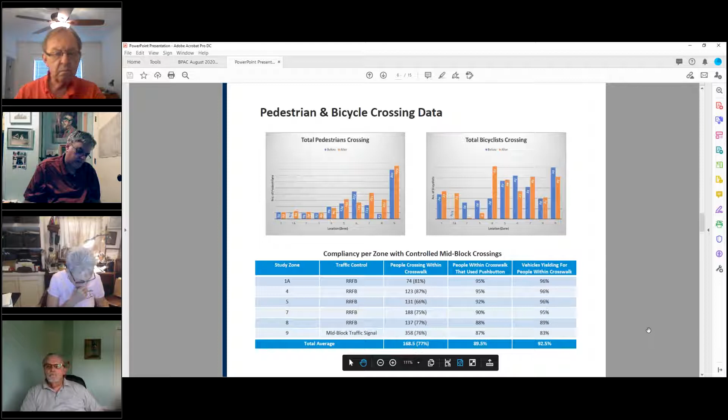And just a comment there, I know it's easy to say let's just go lower the speed limit, but you actually see an increase in crashes if there's not other things done to help lower the speed. The differential is what actually causes an increase in the severity of crashes. So these type of treatments, which overall lower the speed of the roadway, will have an added benefit to the overall corridor.

So just to go through the crash analysis here a little bit, let me zoom in a little bit so that we can see that. I'm sorry, I'm trying to get rid of this thing.

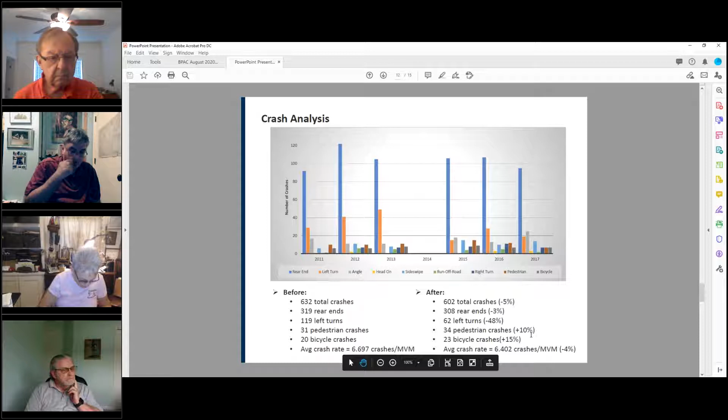So the rate of crashes total declined slightly, although you can see there was an increase in pedestrian and bicyclist crashes. The severity of crashes was down significantly. Just to break those down a little bit more, the volumes were up by about 13%. The injuries were non-incapacitating down by 10%, incapacitating down by 18%, and fatalities down by 50%.

Good. Yeah, that's what I recall, and it seems that's a positive outcome.

Maybe we could do something about the right hooking, such as painting the bike lanes as opposed to just marking them, putting up bollards, although it's kind of hard to put bollards in an intersection. If we could make green boxes, I don't know. Perhaps somebody at MPO could come up with an add-on, if we could think of something.

It's certainly something that we will continue to look at, but a lot of these interventions, mid-block crossings, lowering the speed limit, narrowing the lanes, are really a lot of the interventions that we're able to make, and they are effective. There are studies and crash mitigation factors that go along with these treatments that have been heavily evaluated. And we are retrofitting some of our older roads. We are working with an older system, and it takes time, and it's going to take more time to really continue to bring these numbers down.

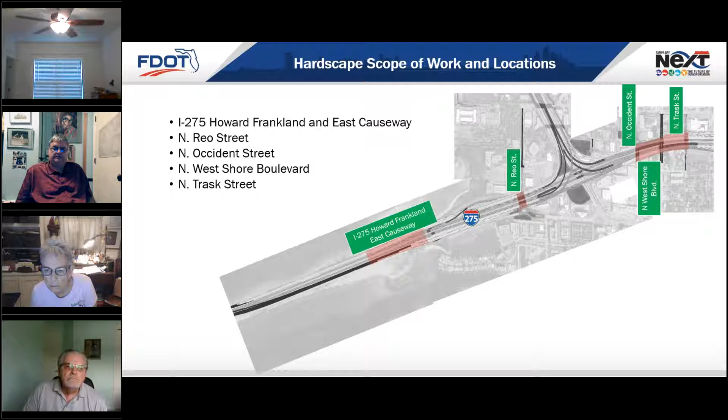Next slide. The process is long and full of meetings. We try to get everybody's involvement, and what we're currently working on is the first round of three reviewing the concepts. So what you're going to be seeing here is part of that first round of development, where we try to develop ideas and areas of opportunity for what we want to do and where we can do it at these locations. What you're seeing on the board is just some inspirational items that help us move along with what we can apply the aesthetics with.

Next slide. First board here is the Howard Frankland Causeway on the east side, as you're leaving or approaching Tampa depending on direction. We're looking at two locations, one on either side of the seawall, and the other being a more solid monumental item that sits off to the side in the water. The exact location and design are still to be determined, we're still laying out the guidelines of what this is supposed to be, so don't take any of this as literal, it's all conceptual. We've developed different views and versions of the concepts to help work through what it might look like in scale and size.

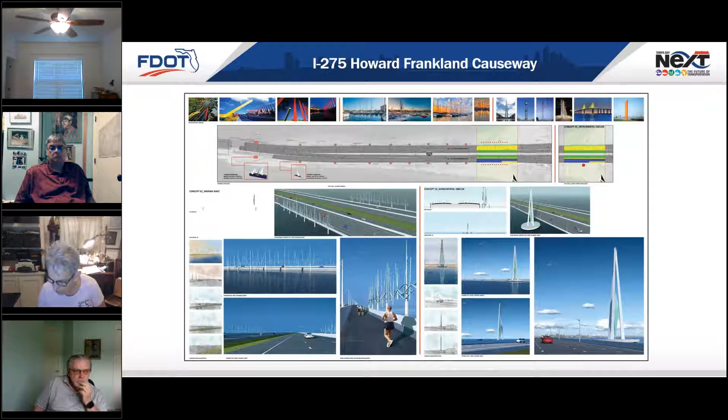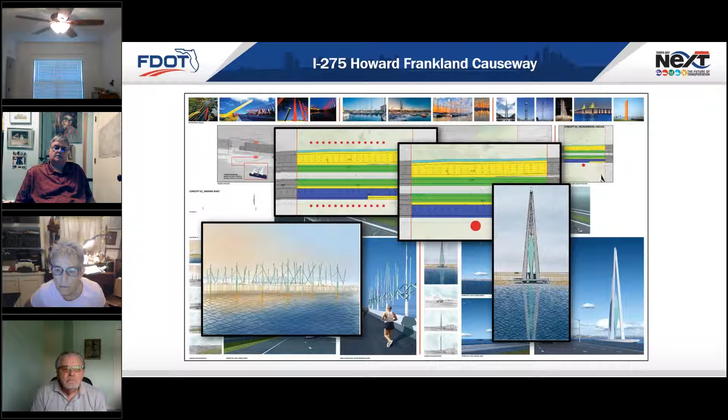Next slide. There's a blow-up of some of the images there. You also saw on the previous board that we're incorporating and acknowledging what they're doing for the aesthetics on the Howard Frankland as well, so we're not completely ignoring them.

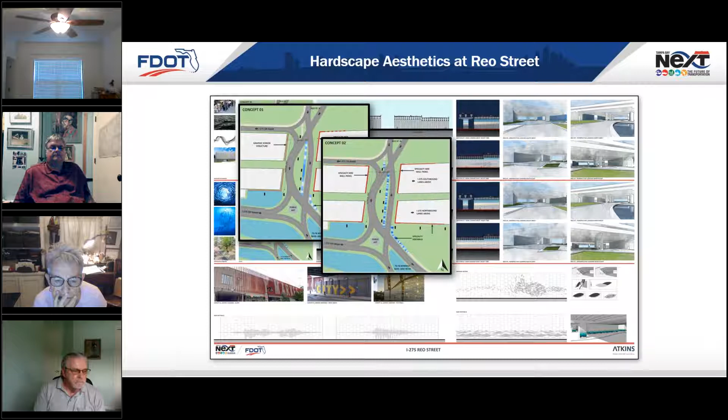Here we have Reo Street, you can click through that slowly. Again, we're looking at different ways of aesthetically treating the MSE walls, the sidewalks, the piers if any, maybe doing a standalone screen structure underneath, and trying different things with how the roads connect with pedestrians and trails. We're also making observations for public art opportunity, showing different MSE wall patterns and ideas that could be public art or a static installation expressing color underneath the overpass. We also try to address this with lighting as a common theme throughout these aesthetic treatments.

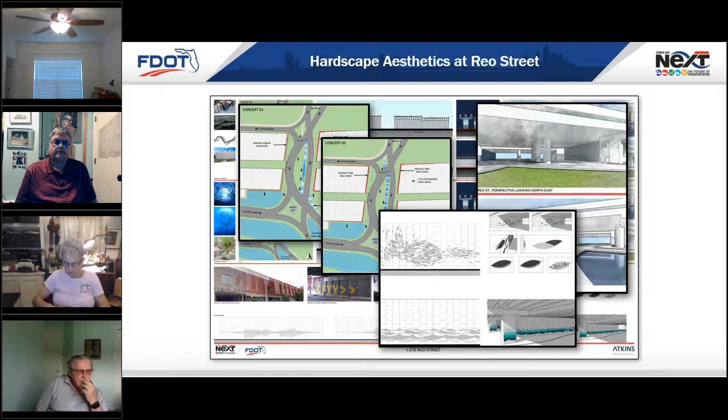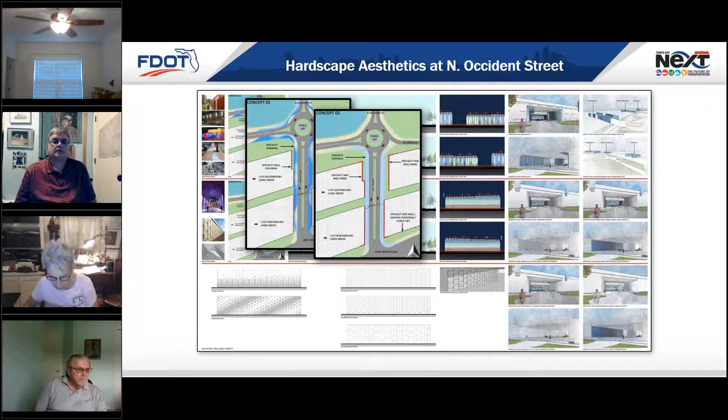Next location is Occident Street, where we have a roundabout to include. We treat part of the sidewalk, and we try to focus this one on being more pedestrian scale since vehicular traffic was expected to be slower and lower count, so we scale things down. We try to involve the roundabout, marking an area of public art opportunity. In this concept we've got the screening, a type of graphic screening, and in the next one we focus on specialty MSE walls and where we can highlight and apply those to the area, with some 3D sketches to give a sense of scale of what's going on.

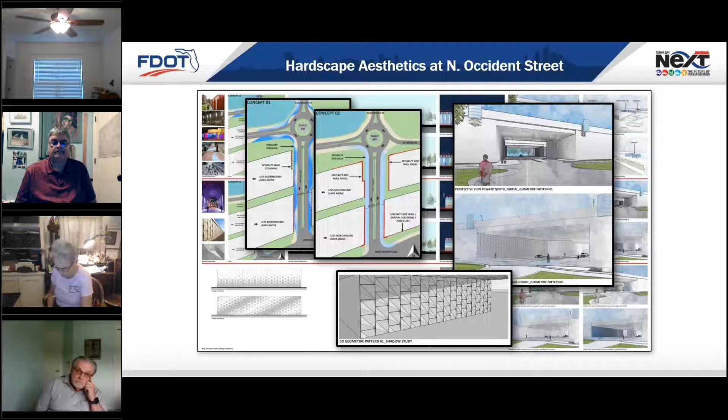And then the idea of playing with 3D MSE walls, so we do little sketches and 3D models for that as well.

Next location is West Shore here. A little bit more vehicular traffic, more pedestrian traffic, so we try to work on a bigger space. We've looked at different sidewalk patterns and treatments.

So again, we have graphic screening, and you can see on the concept boards here that they're a little bit more elaborate.

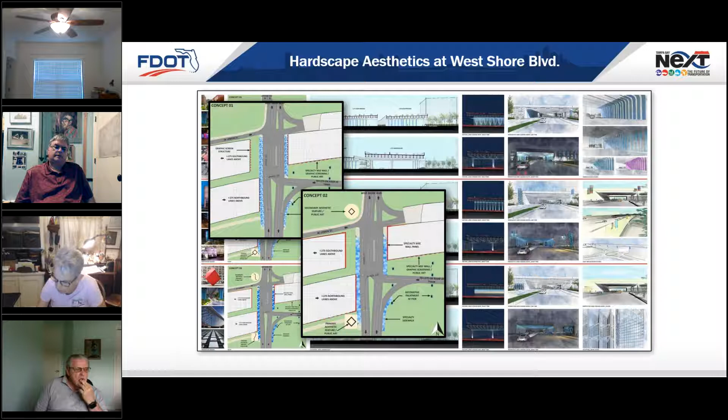And here we're talking about some freestanding structures combined with some specialty MSE walls, kind of bookending West Shore as you're driving through, allowing this to be more of the center of the West Shore district area, kind of like an icon marker.

And again, some 3D sketches, some with nighttime, just to kind of emulate what lighting might look like.

And then there we have some 3D sketches of the tower idea, a freestanding structure off to the side. Something that people can interact with or walk underneath, walk around, or ride their bikes around as they come through on the trail or along the sidewalk along West Shore.

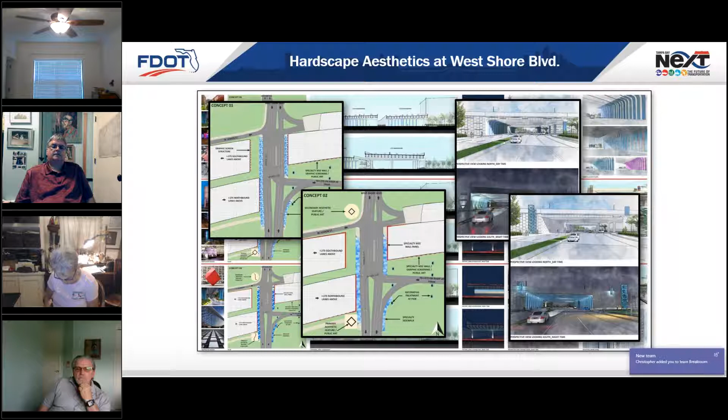And then lastly here we have Trask, where we have a little bit more piers from the roadway as an open structure underneath. So we'll be looking at treating those piers aesthetically as well, and they'll carry on over to the West Shore area. Again, the ground cover locations where the MSE wall is, or the graphic screening.

There we go. That one is for the MSE wall and where we're treating that for any specialty MSE walls.

Again, we've messed around with different types of sidewalk patterns throughout. And the idea is that if people like one pattern in one location but they like it in all the locations, we can certainly look at doing that. We're not trying to say that this is specifically only for Trask or only for Occident or only for West Shore.

We have lots of ideas and lots of things we're trying to get out there, so we're trying to put as much down on paper on these concept boards for people to react to and give feedback on.

Next one. Here we looked at some different pier treatments, what we can do where we're not totally completely different from the standard pier treatment that's being done, and just kind of enhance it and make it a little bit more unique to the area.

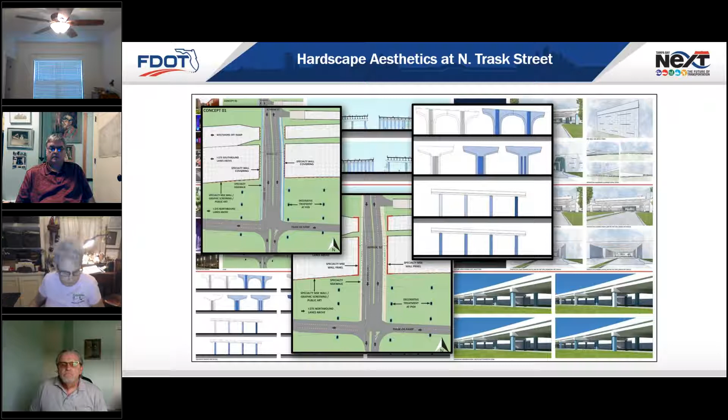And then one more slide. We did some 3D modeling there just to kind of see what it would quickly look like underneath.

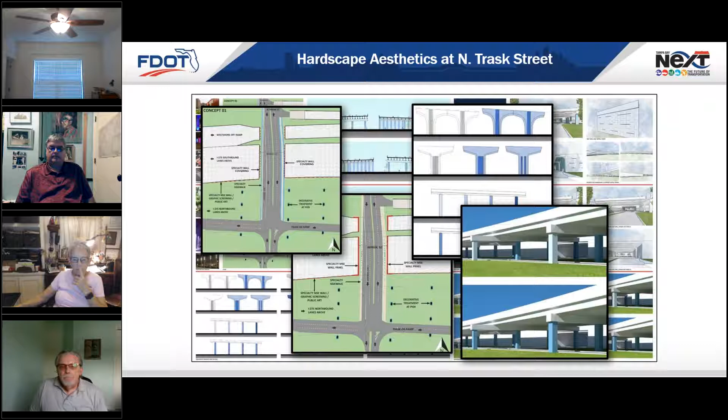So we've got a unifying theme that we're looking into. We're looking at doing repeating wall structures up above, so that as you're driving along 275 you can see these items as you go through the area, so that all these aesthetics are not just for people on the surface roads, but for people driving through on the 275 up above as well.

And then we also have key locations of MSE walls that we can treat kind of like a big broad open palette, if you will, of spaces that you can use along the trail or underneath the overpass, which leaves opportunities for some large scale aesthetic treatment, be it public art or just simple color or who knows what, but we're at least alerting everyone to the possibilities.

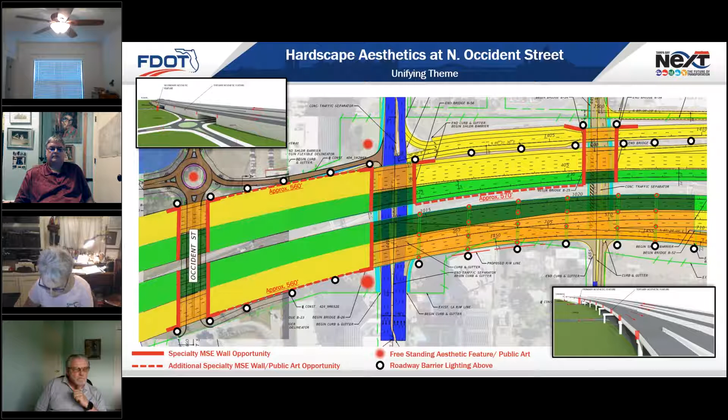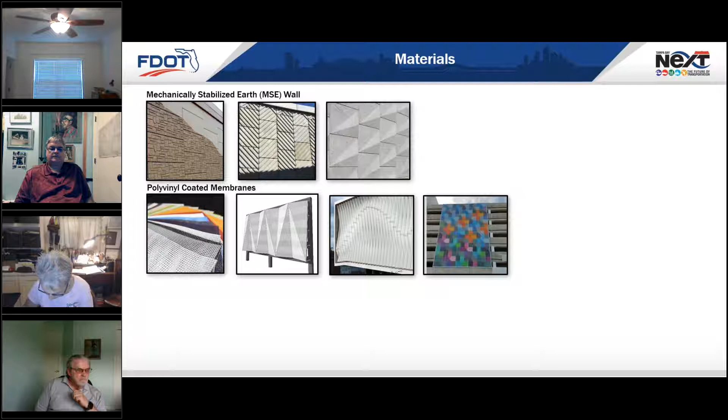And I think that's it in a nutshell. We can briefly click through these - these are just some of the samples of materials and other items that we're looking into that could be applied to multiple of these locations.

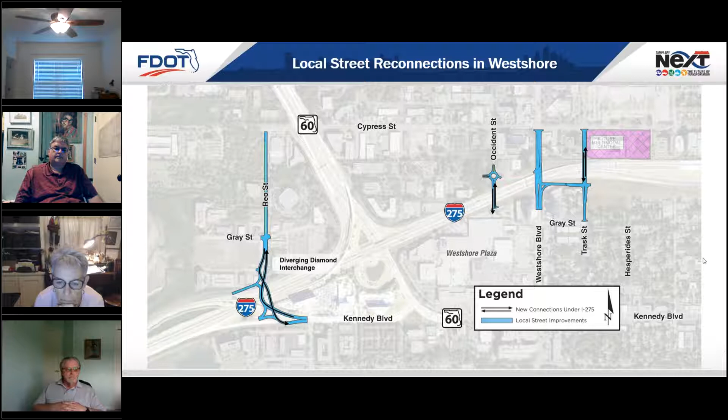So you have the ability at that point to go south and go through the interchange and come down to Kennedy and Hoover, the signalized intersection down there, or you can go north up Reo Street toward the Cypress Point Park. Next slide please.

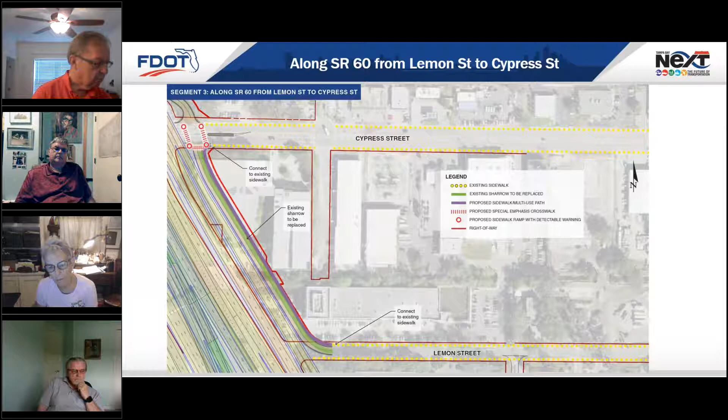Next slide please. Okay, so coming down Lemon Street, it's sharrows all the way until you get to the Occident area. This is the new roundabout that Mark showed. When you get around the roundabout, you can see that the line width gets a little bit thicker, obviously intended to be a wider sidewalk around that area.

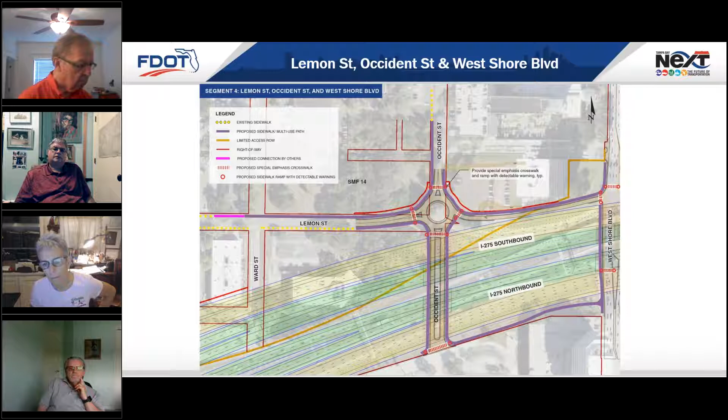But the intent is to show the connectivity that we're trying to go north to tie into the existing sidewalk, which is the yellow dots, and then also pick up from the Lemon Street existing sidewalk. All of that, the trail would come around down through Occident, which is that new underpass area. Then we would be coming from Occident over to West Shore, again within the DOT's right of way, and the trail over to West Shore. So next slide.

We come from West Shore over to Trask, and then Trask to Hesperides. The bright blue line represents the trail that DOT constructed as part of the I-275 design build project back in 2016. So we're tying into that existing path that's already there.

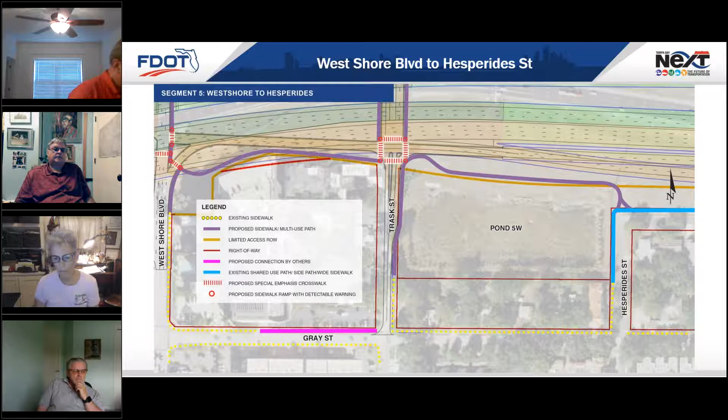This is the continuation of that trail we built in 2016 along Carmen, up Lois, underneath Lois, and then off to the right. That trail goes all the way out to Church, which is one block west of Dale Mabry, for anyone who may not be familiar with this.

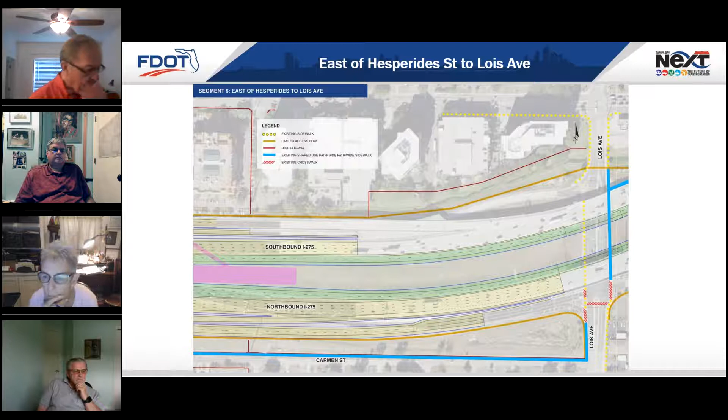This is just to show you that Trask Street, as it's going to be opened, we have trail connectivity or wide sidewalks that go underneath the interstate that would tie over to the future multimodal center.

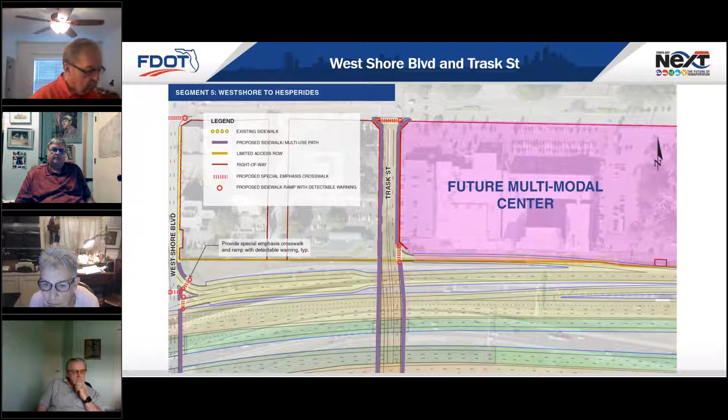So that was a quick overview to show you this is a first cut of our goal: providing connectivity coming off the Howard Frankland Bridge and trying to fill the gaps so that we have wide sidewalks, trails, and utilizing some existing areas with sharrows, like we currently have on Lemon, to provide connectivity over to the trail we already have down to Church. Little by little, we're trying to fill this, but this is our very first cut.

It's an iterative process. We're working with the designers, and as they identify safer or exact locations for crosswalks, or may need to modify something with a retention pond or whatever, we may be tweaking this, and we'll be coming back to you.

We're going to present the same information to the Livable Roadways Committee and to the neighborhood associations in the area, then we'll make revisions and work with the designers again. We're going to start round 2 meetings in December, so we're hoping to come back to you again in January with additional updates. Like I said, it's an iterative process.

This is just the very beginning concepts, and this will be going on for a while, but we wanted to bring it to you so you could start digesting it and giving us comments and suggestions. I wanted Mark to go first so you could see the big picture—it's not just the trail, but the aesthetics that go with all the underpasses and the MSE walls, and the potential for public art. So it's not just a ride along the interstate; it can be something that's an attractive travel route.

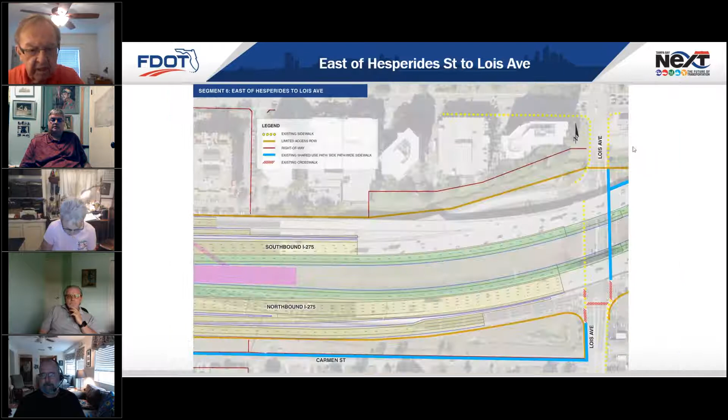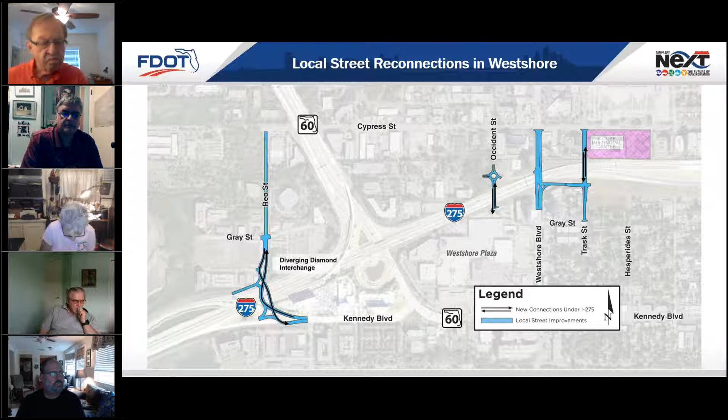Yeah, that's correct, Jim. Let's go back to the Reo area, next slide. I think you were away from your desk when we first started.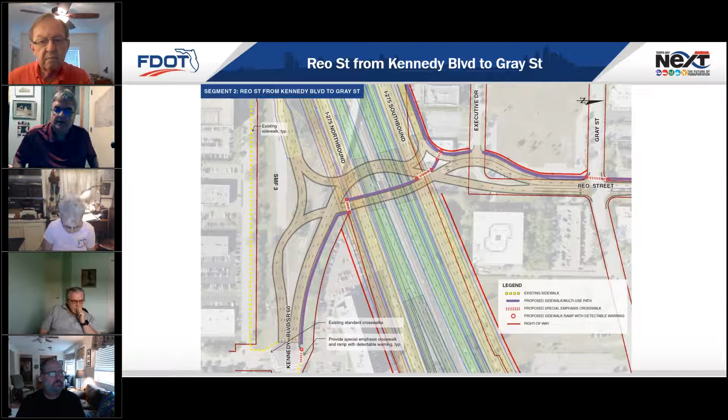So this is the Reo part. At the top there at Kennedy, right underneath the word Kennedy, is where the trail comes in from the Howard Franklin Bridge—that purple line is the trail. It comes in, and then you can either take it north up to Cypress Point Park, and as you were saying, that 10-foot sidewalk goes out to the U-Path, across Courtney Campbell and everything else. So we're making that connection.

Or you can come south through there, which takes you to the signalized intersection of Kennedy and Hoover. For anybody who lives in South Tampa, most people come out in this area—this is where you go back through Beach Park and ride back that way. That's how I usually ride through. There's also a sidewalk that goes over to West Shore Plaza in that area too, but this is the limits.

What you're seeing in purple is what DOT is proposing to construct. When you were talking about it earlier in the presentation, you didn't mention the U-Path, and I thought that's something you really want to bring out in your discussion because of its interconnectivity. Oh yeah, that makes good sense. Thank you.

Other comments? Yeah, this is Tim Horst. I've got a question.

So that side path there that's going along Reo, that's going to make the connection to Cypress, is the goal to make that 10 feet wide? And also, is the DOT going to be purchasing right-of-way there, since I know it's really constrained as is?

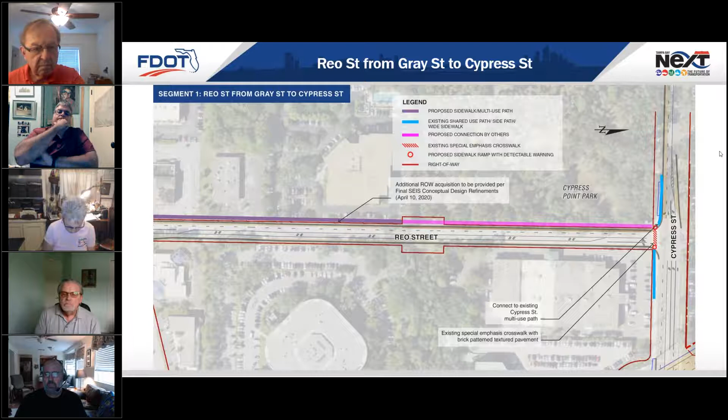All right. I don't know if there are any other questions, but I did want to acknowledge the arrival of our chair, Jonathan Forbes.

I put a question in the chat box. I might have missed it, but how wide are the proposed sidewalks or side paths and multi-use paths going to be along this?

So this is a work in progress, as I was saying, and we have to work with the designers and everything, so it depends upon the location. It could change, but right now the goal is, if it's a trail, for it to be 12 feet wide.

This particular area right here leading up to Cypress, that little piece that we're on, is 10 feet right now as it's drawn.

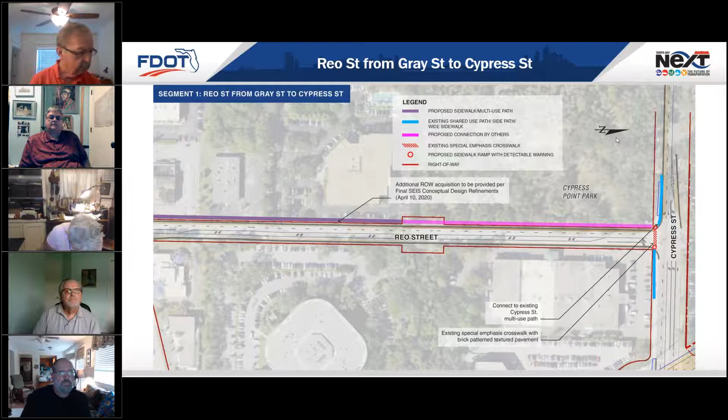So going through the underpass area, like if you want to go to the slide before that, right now going through the interchange at Reo, the area that's right underneath the underpass, we've got it drawn as 16 feet right now, but you can see it's huge, so we have some flexibility right underneath the interchange.

It really just depends. In some cases, like where we're extending it north to try to tie into a sidewalk, we may be tapering from a 12-foot trail to a 6-foot sidewalk. So we're going to do a taper, and we're not going to just truncate it.

Thank you. Thank you. You're welcome. We should have more details on the exact locations and widths in round 2 when we come back to you in January.

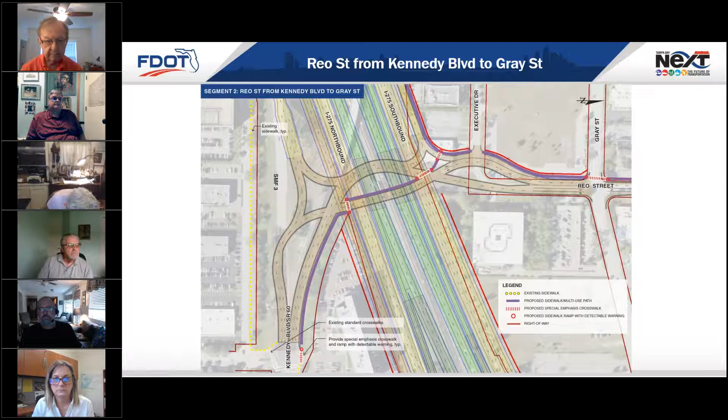Great. Well, if there are no other questions on that part, we can move on to the Safe Trip presentation.

Thank you, Wade. I am Margaret Kubelins, and I am the Safe Trip program manager, or engineer, sorry about that. It's been a long day.

So it's really exciting to see what has already transpired. I've actually never seen some of these elements of what is happening within the West Shore area that were just presented, and I'm very excited about it, and you'll see why, because it does play a part of Safe Trip. So, next slide please.

I don't think I need to tell everyone, but remind you that the governor back in the fall announced that we received $1.4 billion to reconstruct the West Shore interchange, which includes from the Howard Franklin Bridge east over to the Hillsborough River, and then on up State Road 60 up to the veterans. Next, please.

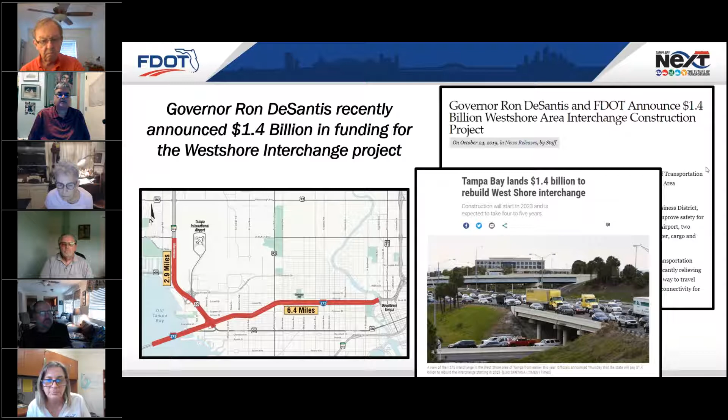Why Safe Trip? Safe Trip is the transportation management plan for the entire area while we're under construction. And that's my responsibility, to help put all the elements possible together in order to help people move through and all around West Shore while we're under construction. We have significant bottlenecks there already.

So how are we going to help smooth those out is what we're looking at and working on. We have goals that are consistent with the overall TB Next project, and it's going to take a lot of balance and travel demand. You'll see as we move forward through this process that one of the elements that's going to be key is for us to provide a wide variety of quality transportation choices for everyone that lives in the area or who's traveling through there. Next, please.

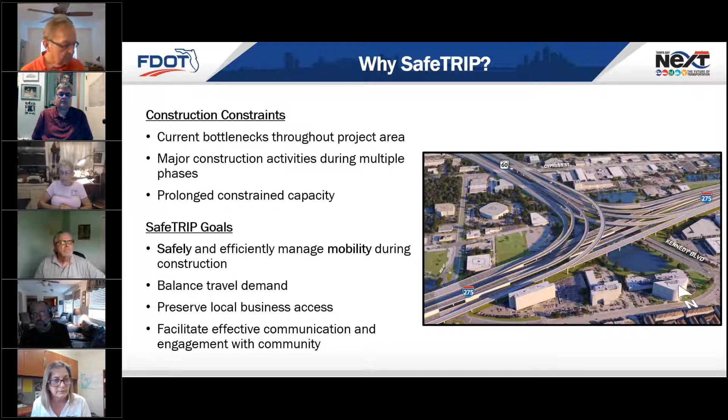Safe Trip, as I mentioned, is a transportation management plan. And safe, meaning that we want to make sure that it's safe. I'm a Vision Zero advocate and understand that whenever we have crashes, we accept the fact that there will be people running into each other. But when that happens, we want to make sure that we can provide the best conditions to heighten the probability that everyone involved in a crash will either walk away from it or be able to fully heal. With that in mind, we are looking at TRIP.

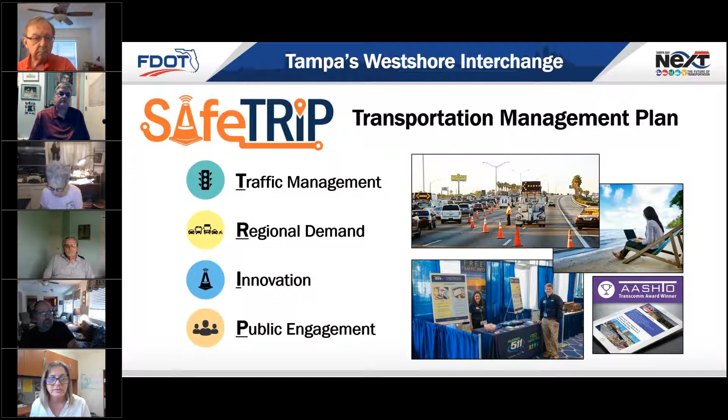The TRIP portion of this stands for traffic management, regional demand management, our innovation pieces, as well as public engagement. Let me talk through some more details of each of those. Next, please.

First of all, as you approach any kind of program, you want to make sure you have a vision that you can back-check yourself on all the decisions you make. We've committed in our vision to make sure it's well planned.

We maximize on innovation, which has a lot to do with technology, predictive analytics, and pushing real-time data out to travelers, no matter what mode they choose to use.

We are focusing on establishing our performance metrics around safety and reliability. Reliability means that if it takes you about 20 minutes to get to the airport now, once we go into construction, it's reasonable to anticipate it might take 30 minutes, but we want it to consistently be 30 minutes. Or if you're traveling during peak hour, maybe it's 40, but at least you can predict reasonably what it's going to take to get there.

As I mentioned, quality transportation choices is what's going to give the quality of life to everyone who travels through the region. Strategic innovation is the technology component, and then proactive communication.

TB Next is what it is today because we had a previous project that brought in a lot of conversation in a very difficult way. From my perspective, I'm new to the DOT, I've only been here about 1.5 years, but I see the benefit is we have a much better project than we could possibly have had because of the advocacy and outcry that was presented.

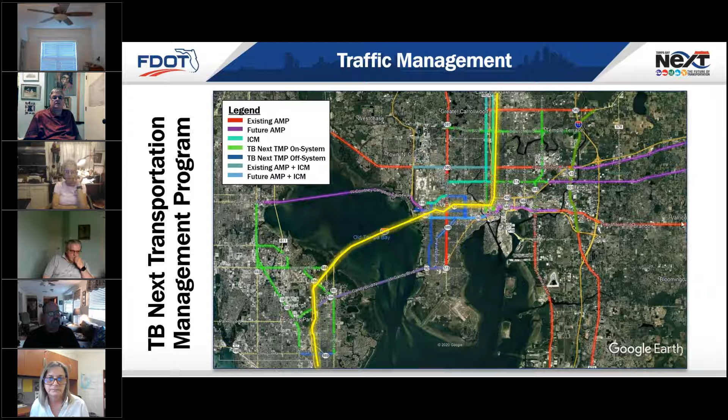Under regional demand management, where we are right now is looking at the origin destinations. We're getting the data put together to understand in more detail, from the larger picture, where we need to have better, more accessible transit projects—which routes are going to be used the most, and then how can we leverage that.

We're also having the conversation in regard to first mile, last mile concepts in planning. For the first mile, not just having a park and ride for vehicles, but we're also looking at whether we have quality bicycle facilities or bike parking, and how we manage that as well. So we're trying to address multimodal options at both ends of the project.

We also are looking at the origin destination with a 3-mile radius concept, getting into a closer network. We are evaluating that, looking for bicycle trips. A 3-mile radius is a reasonable bicycle trip for a commuter.

We just saw a lot about the network along 275, but what about people possibly living in Soho and working in Westshore—people that are moving through the area every single day? So we are taking a look at that as well.

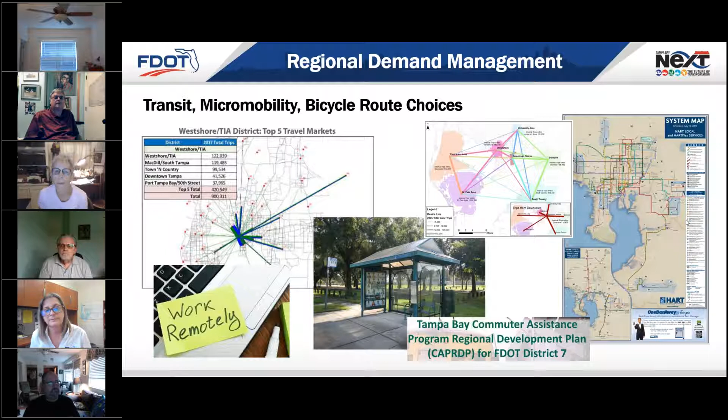So in smart work zones, there are two things we want to focus on. In regard to the Federal Highway Administration, a smart work zone needs to be portable, reliable, real time, and automated. This is technology that exists, it's just being applied in a different way.

The speed harmonization - the major goal associated with speed harmonization is to reduce the number of crashes that we may have amongst vehicles that pass through a work zone, which is really important if there's a traffic shift.

Here's another one, called the zipper merge. This is going to require a lot of public outreach and public education, and we've already had conversations about how we can get ahead of this. Wade, could you try to see if we can get the zipper merge PSA up?

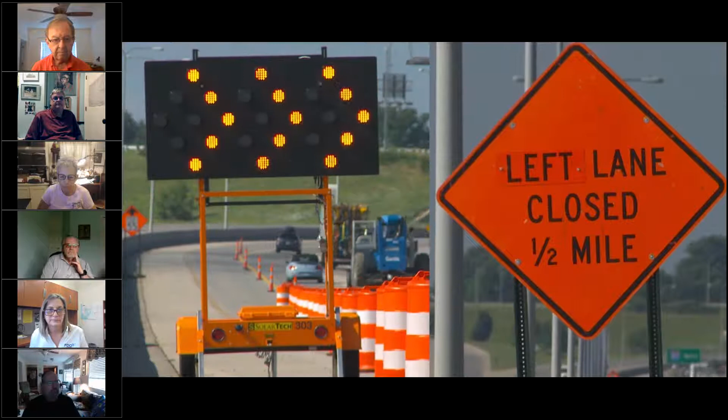Uh-oh, when we tried it, we had it. I don't hear it. Wade, should I do a voiceover, or are you going to try it again? I'm looking for the button. This is Chris, I'm looking at this. I'm not totally sure why there's no audio. There should be. Wade, you could turn the captions on as a stopgap - it's the CC button right there, next to the gear.

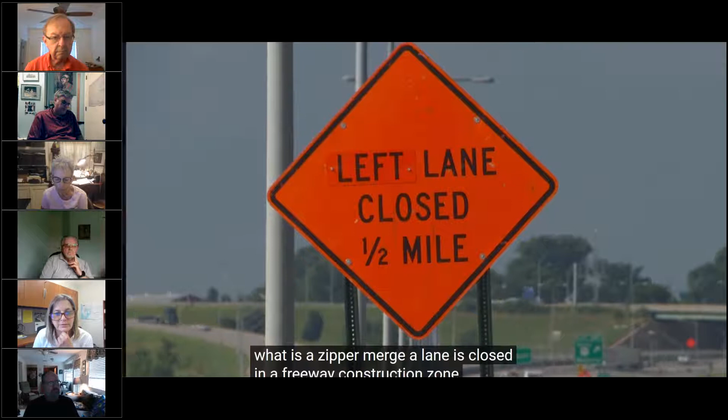Do you want to start? Yeah. I was going to do the voiceover - is everyone reading fast enough, or do you want me to explain it? Looks good to me. Okay.

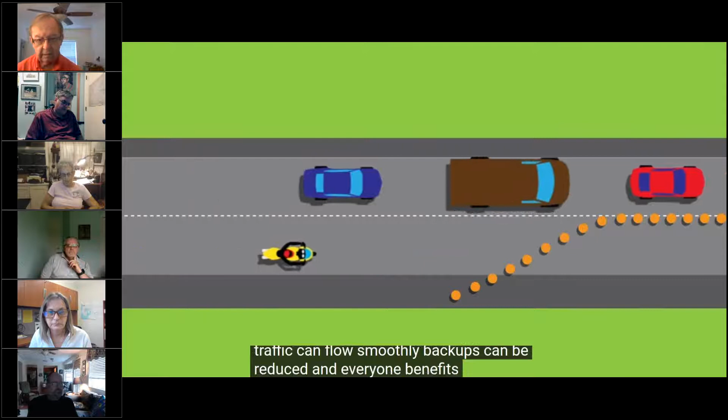Okay, well, that gives you an idea of how it works, and you may just on your own time go to YouTube and look that up, zipper merge or late merge. It's proven a very effective way to help manage the use of lanes. We also expect that once people see this being advertised through different projects, they're going to begin to apply it in multiple locations naturally.

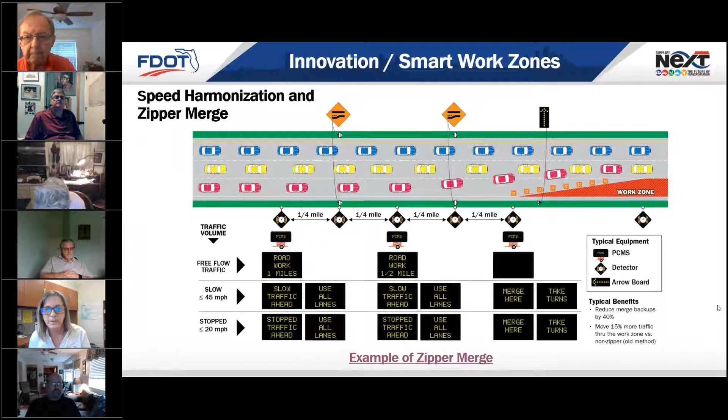So it'll be interesting to see how it changes driver behavior once they learn how it's used. We expect it's going to be similar to when we started using a flashing yellow arrow - it was very intuitive to people. Next slide, please.

So public engagement - we already have the Florida 511. That is an app you can use, but a lot of people don't realize that Waze pulls data from the Florida 511 system to help understand traffic conditions on the road. They use what's called probe data as well - your smartphone is a ping also, but this is another data source that they use, and we're providing that to them.

We also use our Tampa Bay resource - fdottampabay.com - where we have a lot of information out there. We are looking for ways to communicate with the public, and during this process we'll continue asking for feedback to make sure we're meeting people basically where they are as much as we can. Next, please.

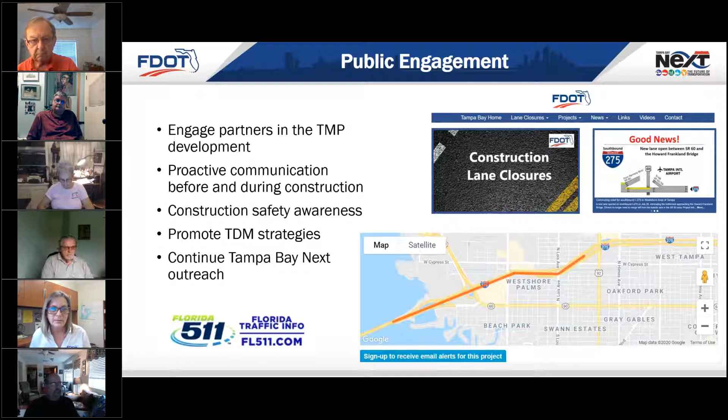We have already had a very robust opportunity to do public engagement, and we continue to provide updates to a variety of communities. Obviously, now that we've gone into virtual formats, it has actually provided us the opportunity to meet more and more people as well. As soon as we can, we'll be face to face, but we'll make do with what we have so far.

Next, please. We also have a community action task force, and here is a representation of all the members we have, so other agencies and organizations also have a place at the table. This is a bit more of the professional organization level. We're getting a lot of information from various entities and having a lot of conversations with them, including Florida Trucking. We need to make sure we're addressing all the issues that could possibly come up. Next, please.

We've also gone through a series of lessons learned. We've already met with District 5 over in Orlando for I-4 Ultimate, and we've been receiving all kinds of information from them about what works and what didn't. We already know how we need to structure the contract to make the contractors part of this process - that came out of the I-4 project.

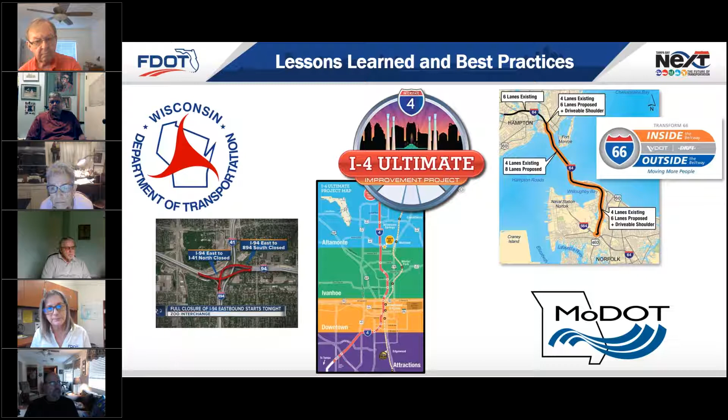So here's our overall schedule. As you know, we're in Q3 of 2020. So we are in the midst of developing our SafeTRIP plan, and we are in the process of putting just about anything and everything on the table right now, any kind of strategy. We recognize that the Department of Transportation is not going to be able to fund absolutely everything.

One of the reasons why we're having conversations with all these other organizations and agencies is that there may be an opportunity that maybe they can do a grant and bring a small element. Like I mentioned, the first mile, last mile - there may be an opportunity that if we provide bike parking up at a park and ride, maybe they can reach out and get some funding to build a better bicycle network to get more people to have that as an option for traveling to the area. We expect to have our plan done in the spring of next year.

During this whole process, we will continue to push to have early project deployment. We're very interested in getting things on the ground before we go to construction. You'll note that on the very bottom line, we show update Safe Trip - we're going to pause for about 6 months, but then start reevaluating. The Safe Trip plan will be a living document with shifts and changes throughout construction, which is going to start in 2024. It's about shovels in the ground, and we'll be under construction probably for about 6 years.

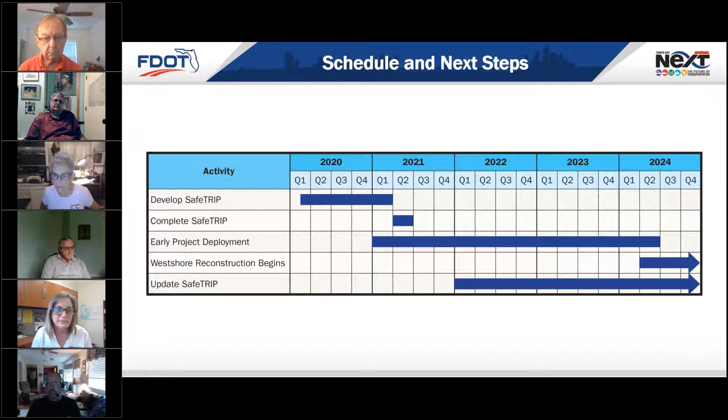Next slide, please, which I think may be the end. Yes. So I'd be more than happy - I know I put a lot of information to you, but I'd like to open it up for questions if anyone has any.

We'll get that bicycle network construction - actually, I know there's some early starts. Alex Henry is probably really grateful that I had the opportunity to listen to what is already a part of TB Next. But I'm interested, I'd love to see some of those projects already built before we go under construction. I don't know if we can make that happen, but we'll see what we can do.

Okay, well, thank you. And I can come back at any time. Thank you, Margaret. You're welcome.

Well, I'm up next. So if there are no questions for DOT, let me get my presentation up. This is just a brief update on some of the process and some of the changes that have been made this year.

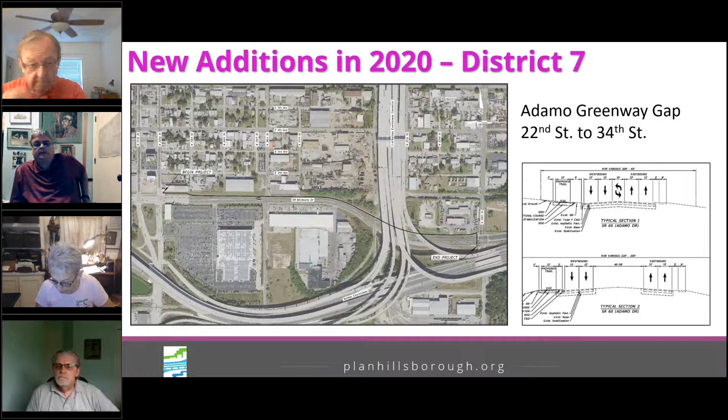Just to give you a couple of the new additions that went onto that list in District 7 in 2020 - this is the State Road 60 Adamo Drive corridor. This connects to the South Coast Greenway and Gulf Coast Trail, so where the path ends at 22nd Street, you would be able to go south or west and hook up with the Selmon Greenway, and same thing at the east end, where you would eventually be able to go over to Maydell Drive and then down across the Palm River.

The other District 7 addition was a crossing of State Road 54 at Starkey Boulevard. This is where the trail segment was just completed between Pasco and Pinellas, and it's right at the very northwest corner of Hillsborough as well. So this is something that eventually becomes part of that larger network, with the Upper Tampa Bay Trail connecting to the Gulf Coast Trail.

District 1 had several new additions, 3 in Polk County and 2 in Manatee and Sarasota. They were largely just redoing their priorities. They had a shorter list than we did to begin with, so I would not take the addition of 5 for them versus 2 for us to mean anything in particular.

But these are just the examples: the Lake Hunter Trail, the Fort Frasier Trail Extension, the Panther Point Connector, the Palmetto Trail Network, which would be the city of Palmetto, which is a really important connection as we try to bring the Gulf Coast Trail down through there and then up into Hillsborough. And then the Ringling Bikeway, which is the urban park through the city of Sarasota as well.

And those are the major regional additions. I did just want to go through for the rest of the presentation what you'll see is all of the trail projects that we have funded for one stage or another for construction at first, and then I'll get into the other stages.

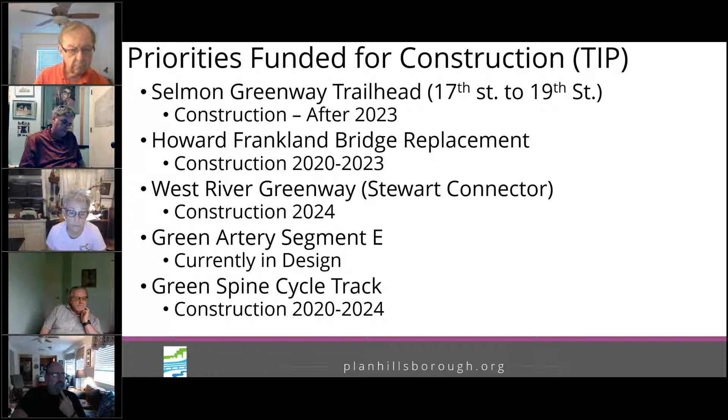Next, the Green Artery Segment E, which is currently in design and moving forward. That is the segment just west of Florida Avenue, moving south along the north side of the Hillsborough River. And then the Green Spine cycle tracks, all segments are funded and construction will be going now through 2024.

Continuing on, Morris Bridge Road from Fowler to Fletcher is set for construction in 2021, next year. And then the next one, State Road 60 from Rocky Point Drive to Rocky Point Creek.

This is a project that this committee moved forward. I'm not sure if Holly Simmons is on, but she lives in that neighborhood, and this was one that she was very passionate about because it's that north side of the causeway, that connection from Rocky Point Drive to the east.

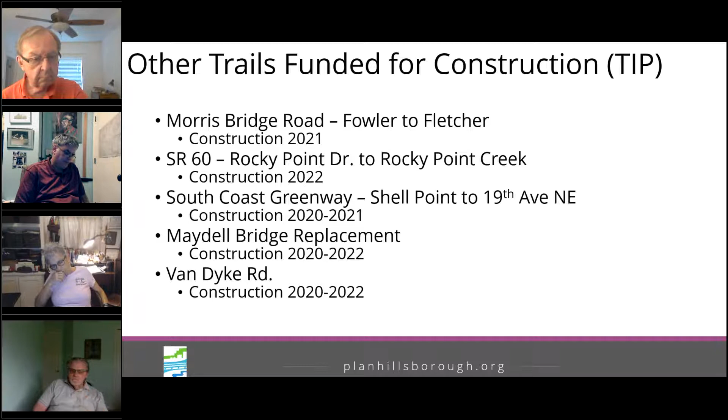The South Coast Greenway, the Shell Point to 19th Avenue segment is moving forward very soon. The Maydell Bridge replacement, construction is set to run through 2022. And then Van Dyke Road, which we've talked about, an important connection in northern Hillsborough County, will have a side path along with it. Construction is 2020 until 2022 as well.

Just another couple that are moving forward in the next few years for design or engineering. The Big Bend Road overpass, which is also part of the Gulf Coast Trail / South Coast Greenway. The Bypass Canal Trail, which is undergoing PD&E, which will help put that into segments that we can move forward into construction phases. And then the South Coast Greenway Phase 3 is also moving forward in design phase.

So that's all I have. If there are any questions, I'm happy to take them.

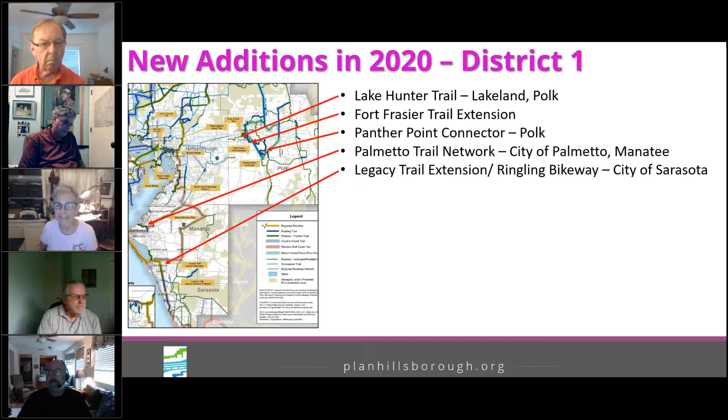We did get an update based on Mr. Lamarca's original request for several locations to receive maintenance. There were positive responses in a few of those, and I know they're working on some of the rest. Richard, if you want to address that, please.

Yeah, it's more of a maintenance issue, but if I recall, there were several street maintenance issues, debris on the road, and he mentioned 4 or 5 locations. So that got forwarded to the maintenance people, and they've been addressing them along the way. Some of them, I believe, actually require manual maintenance because they fall behind some delineators. I'm sure the city of Tampa has that same issue.

So in the era of COVID-19, maintenance is doing the best they can, as quickly as they can, to address all the maintenance issues and requests that come in. So those were brought forward to them and are being addressed. I think most of them have. Thank you, Richard.